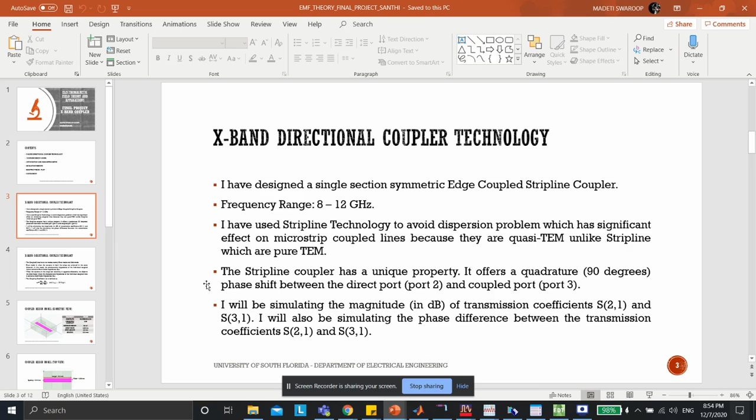So we have two modes in coupled line couplers. That's called even mode and odd mode. When the coupled lines have current traveling in the same direction, then we'll have even mode, and the impedance of each line is known as even mode impedance.

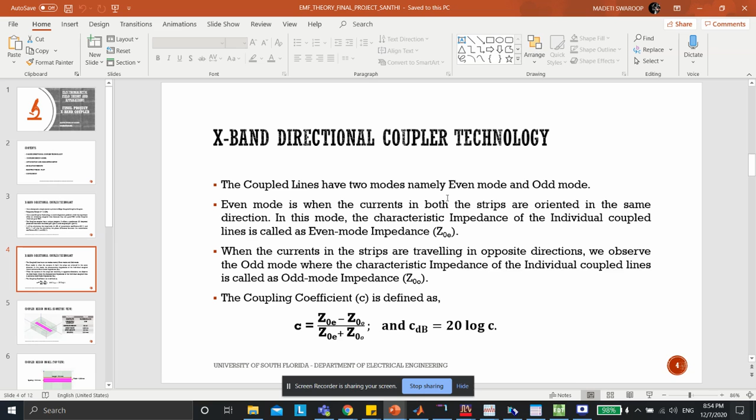And when the currents travel in opposite directions, we have what is called an odd mode, and the impedance of this individual line is known as odd mode impedance. So we can calculate the coupling coefficient as even mode impedance minus odd mode impedance divided by even mode impedance plus odd mode impedance.

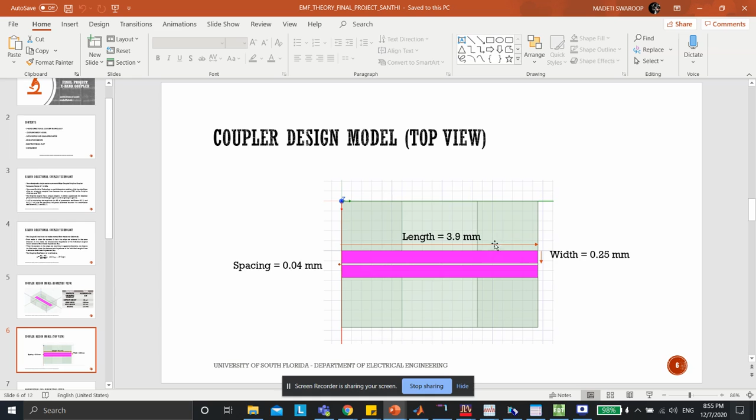So this is my coupler design. I have two strips, and the substrate I'm using is Rogers RO4003, and here are its properties. This is the top view, the lengths and widths. So initially I used LineCalc to determine the width, spacing, and length of the coupled lines.

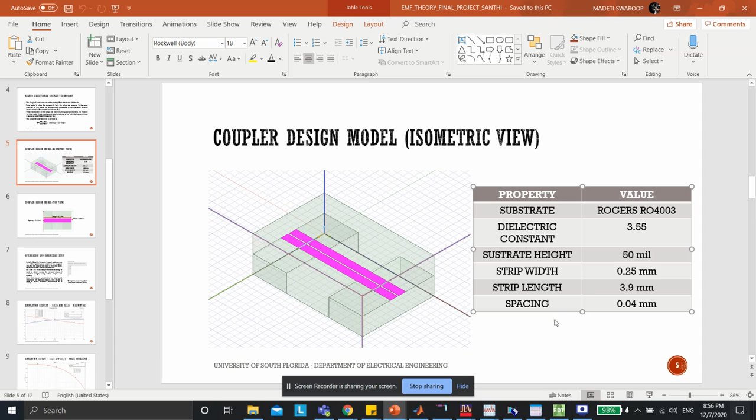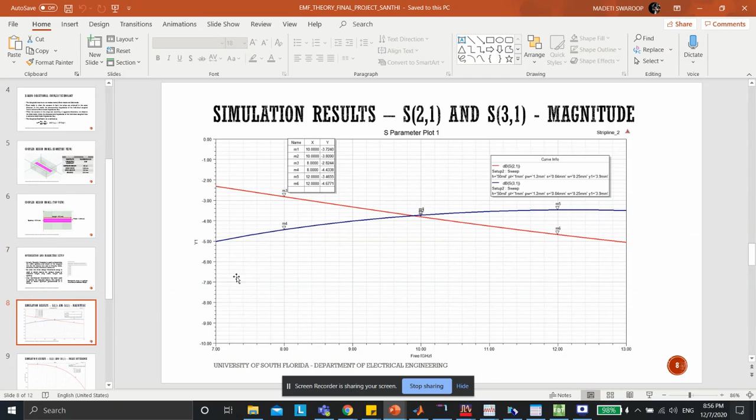And finally, I used optimization functionality. This optimization functionality I will show you a bit later. So these are my results, and this is the animation. So now going into HFSS, this is the thing.

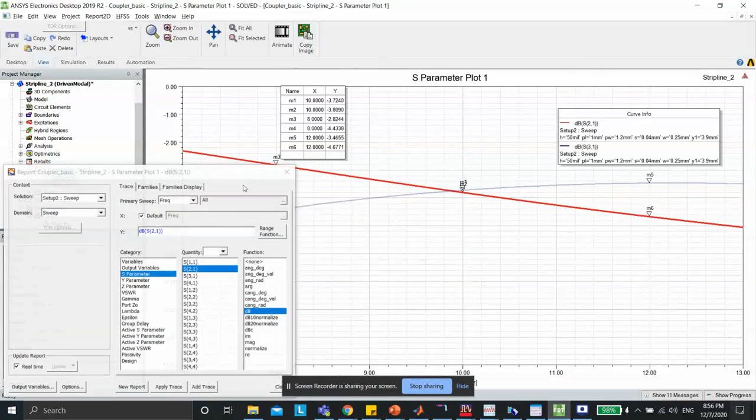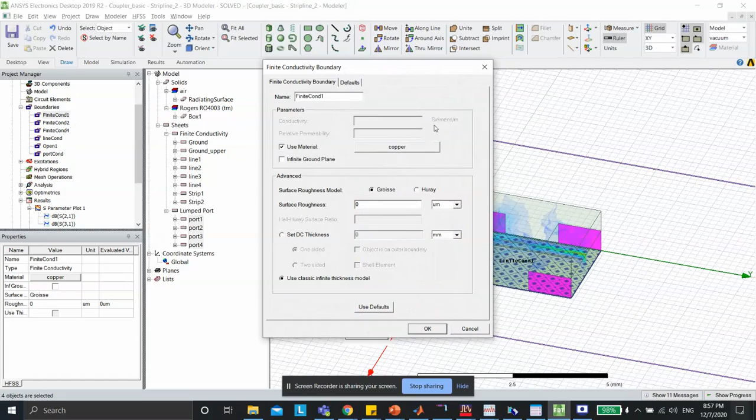So these are the four ports: port 1, port 2, port 3, and port 4. And all these boundaries are copper. I'm using copper as conductor, as material, and I'm using a lumped port excitation. And the solution setup is from 8 to 12 gigahertz.

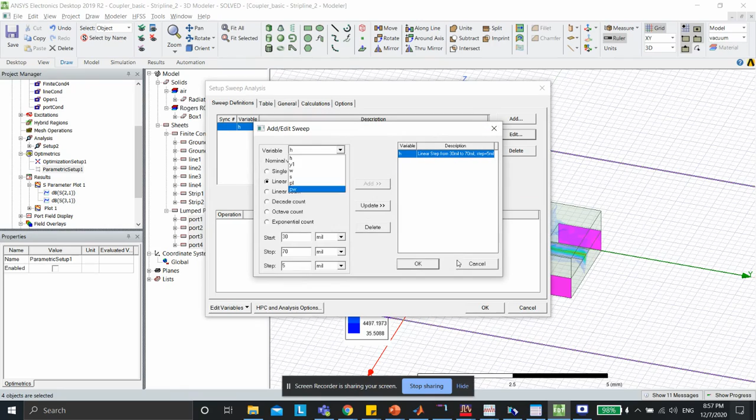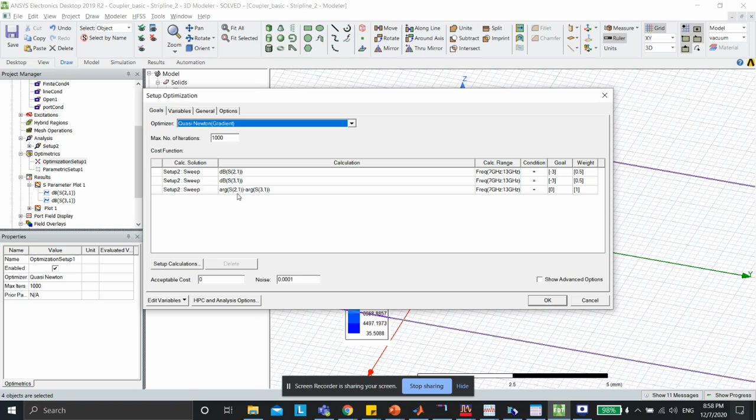This is the parametric setup, so I can edit and change these values, and if I analyze, I'll get all the results, and I can choose whichever is close to what I intend. And this is the optimization setup. So what I was trying to do is getting S21 as -3 dB and S31 as -3 dB, and the phase difference to be 90 actually.

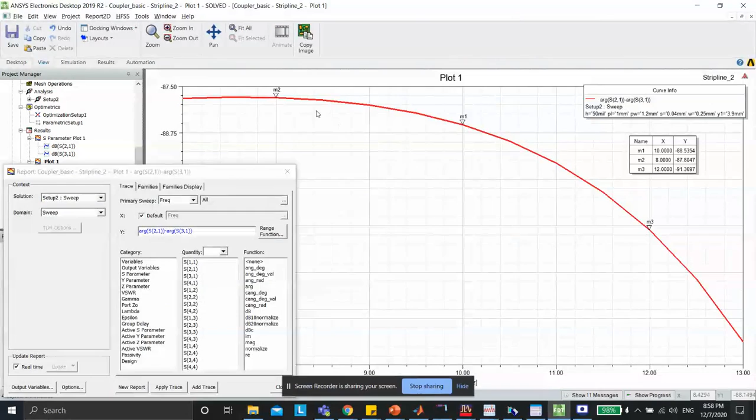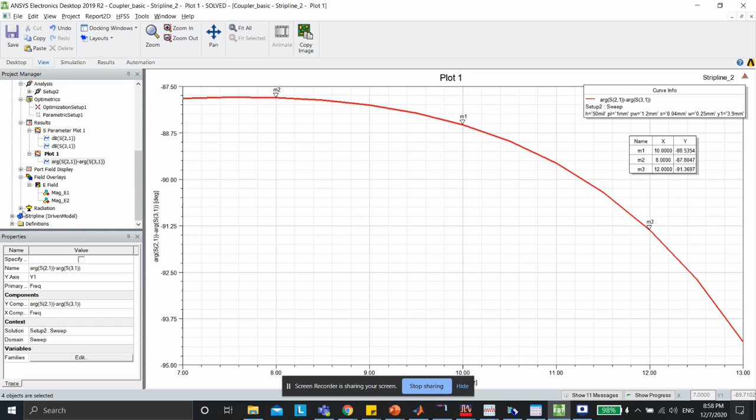And I got the phase difference as this. So I was getting plus or minus 2 degrees as phase imbalance. So here is the animation.

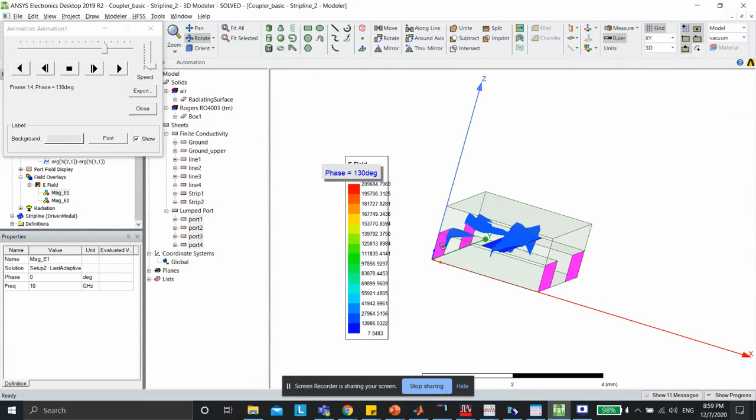As you can see, this is port 1. So from port 1, we're getting the signal, and we can see the strips interacting with each other, and some part of the signal is going through port 3, and the other part is going to port 2, as we can see.

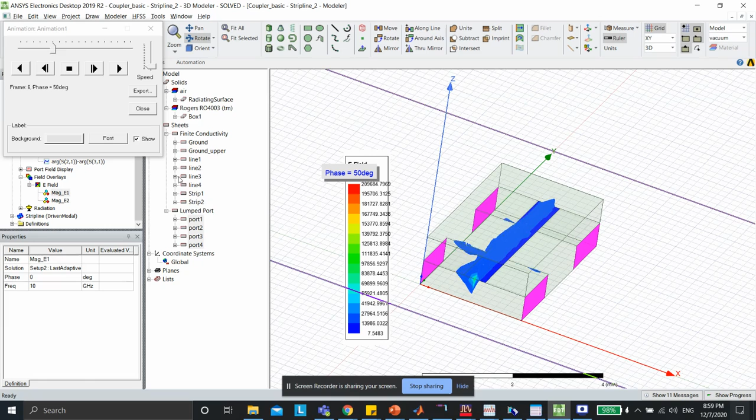So this is my project, and I have done the microstrip as well. But the problem with microstrip is, as I mentioned, the phase velocities are different above and below this conducting layer, so we don't get the results as expected.